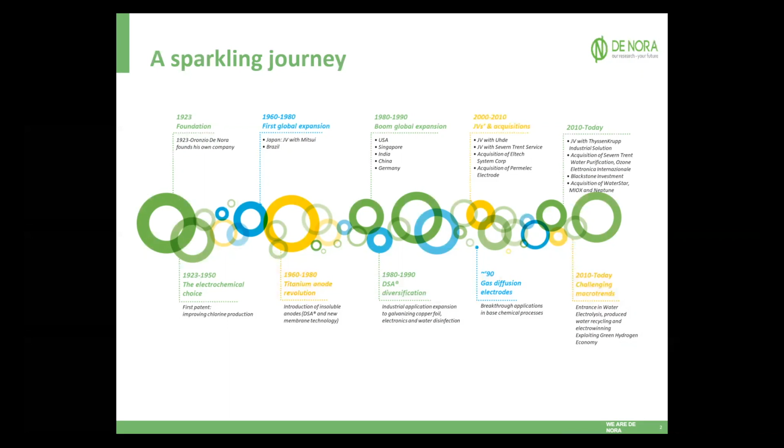De Nora Water Technologies. Water made easy is not just a phrase, it's a core value we hold dear at De Nora. De Nora Water Technology is a market leader in the field of water and wastewater treatment. We offer the most reliable, effective solutions, developed through more than 50 years of experience across municipal water, energy, marine, and industrial applications. Our global support network with 23 offices and 9 factories enables us to provide the highest level of support to our customers and distributors.

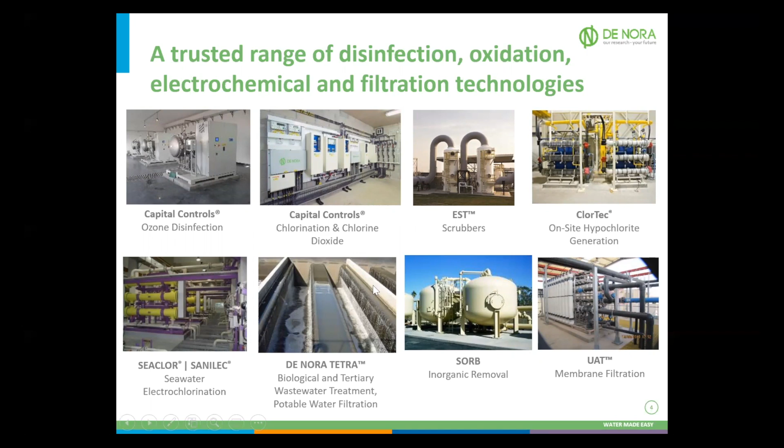Now, the range of products we offer. Under Capital Controls, which belongs to oxidation, we have the gas feed systems and chlorine dioxide. We also have ozone for higher oxidation requirements by customers. In the electrochemical range, we have ClorTec on-site hypochlorite generation, SEACLOR, and Sanilec for seawater chlorination. For filtration technology, we have membrane, inorganic removal which we call SORB, and De Nora TETRA for water and wastewater treatment.

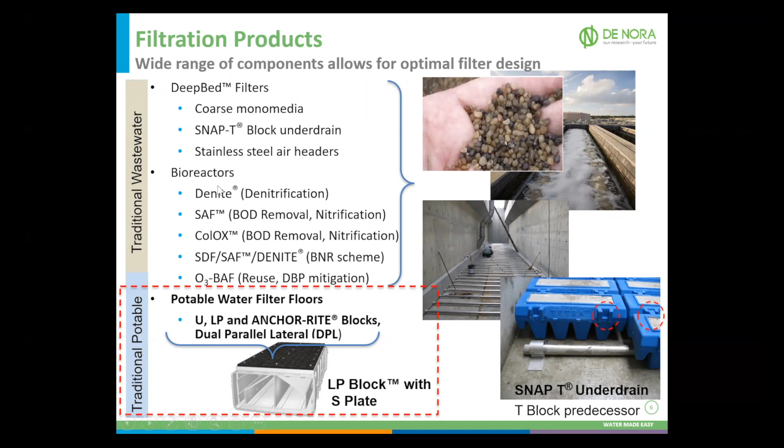Let me share with you our De Nora dual parallel lateral. De Nora provides solutions for both potable and wastewater applications. In wastewater, we develop deep bed filters that offer media, snap T, and stainless steel air headers as a whole package to our customers. As you can see here, this is the snap T, and this is the air header pipes. On the bioreactor side, we also provide solutions to your needs. As of today, I'll be sharing with you our underdrain system for potable water.

A brief history of TETRA, which started in the early 1960s. During that time, we were manufacturing concrete underdrain blocks. It was only in 1997 that U-block underdrains were introduced, made of HDPE. Two years later, media retention plates were introduced to be installed on top of the U-block. One year later, the LP block was introduced with increased surface area with GroutGrip. In 2008, we introduced the FlumeFlow design.

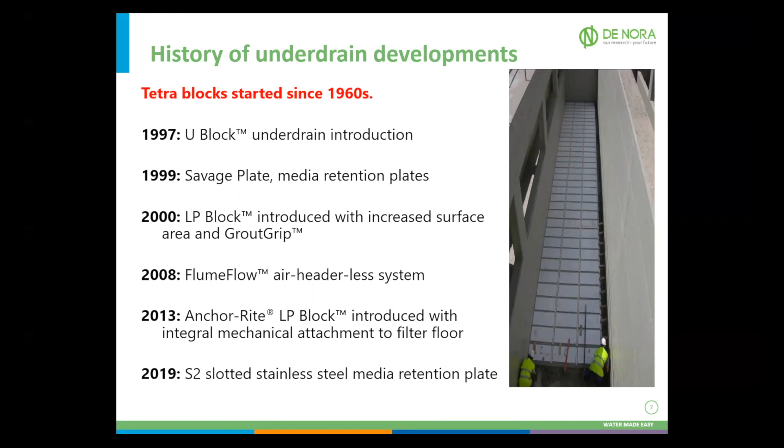It allowed contractors to use less material, or rather what we call the air header-less system, reducing cost savings for the end user. In 2013, the Anchor-Rite LP block was introduced with integrated mechanical attachment to the filter floor. In 2019, we introduced the slotted stainless steel media retention plate to the market.

This slide shows our different types of underdrain blocks. On the left you can see the U block, or universal block, which has been in the market for more than 20 years, and probably you can find similar blocks with the same dimensions in the market.

Next to it is our LP block. LP meaning low profile. As you can see from the height, it's much lower by about 4 inches, and the width is wider, while the length is the same.

For this block, we have patented our GroutGrip for the hold-down mechanism. With a wider width of the block, customers normally use about 1/3 less lateral, with fewer joints, more effective active area, and faster installation.

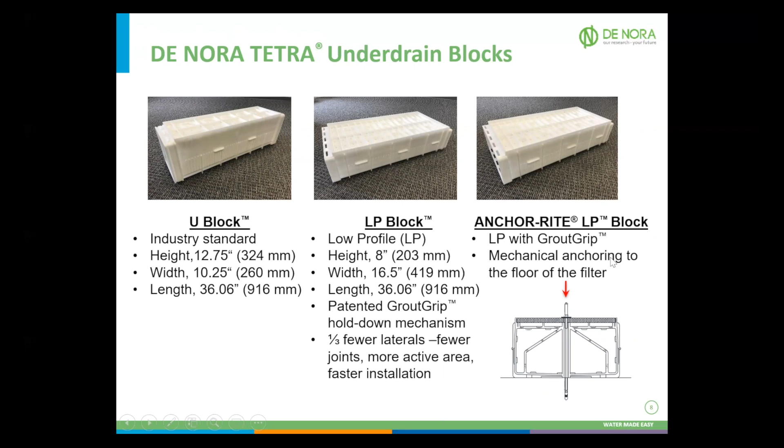On the right side is the Anchor-Rite LP block, which is an additional option. We have added the mechanical anchor rod to the filter floor on top of just using the GroutGrip.

Here you can take a closer look at the 3D dimensions of the U block and the LP block. As mentioned, the LP block is low profile and wider, as you can see from the dimensions here.

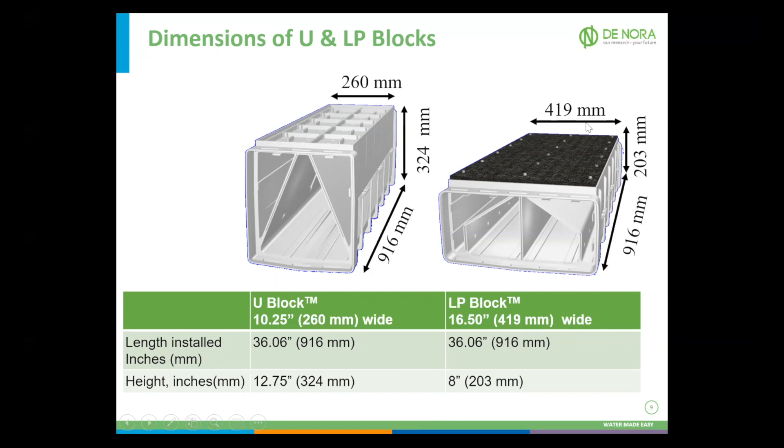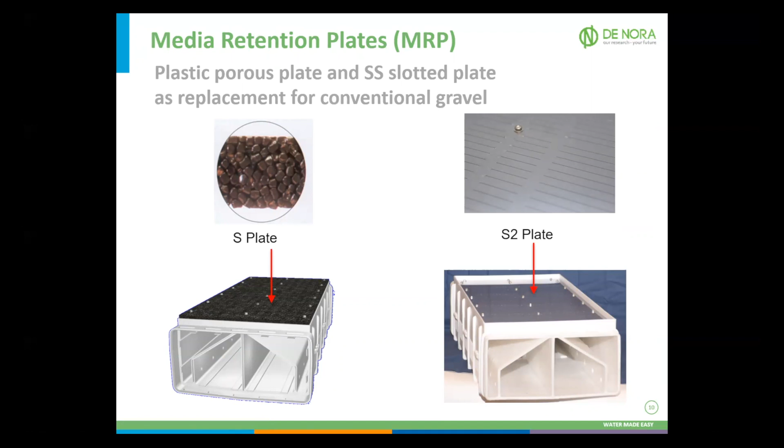For the LP block, we offer the media retention plate as a replacement for conventional gravel. So customers have the option, instead of using gravel, to select the media retention plate to reduce the gravel height in their tank filters.

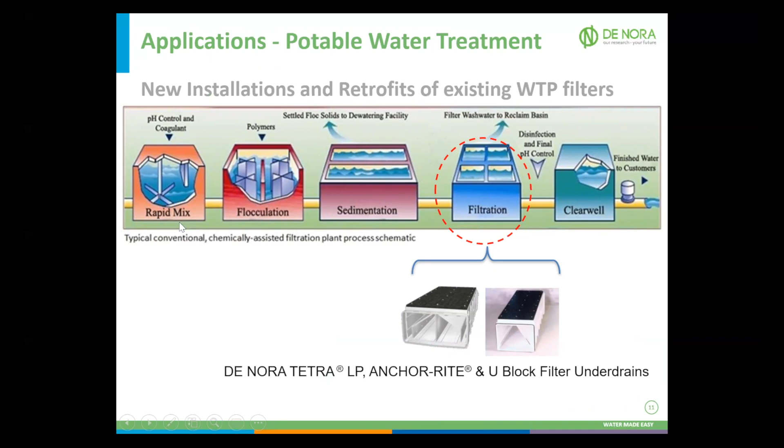This slide shares that the De Nora underdrain system can be used in both new installations and retrofits of existing filters. This is the typical water treatment flow, and this is where the underdrain block can be used.

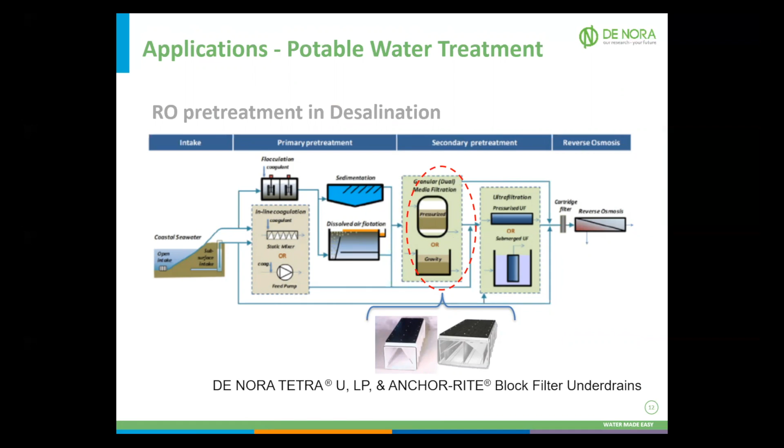The De Nora underdrain can also be used for ozone BAC, where existing filters can be upgraded or retrofitted to biological activated carbons, with ozone introduced earlier in the process.

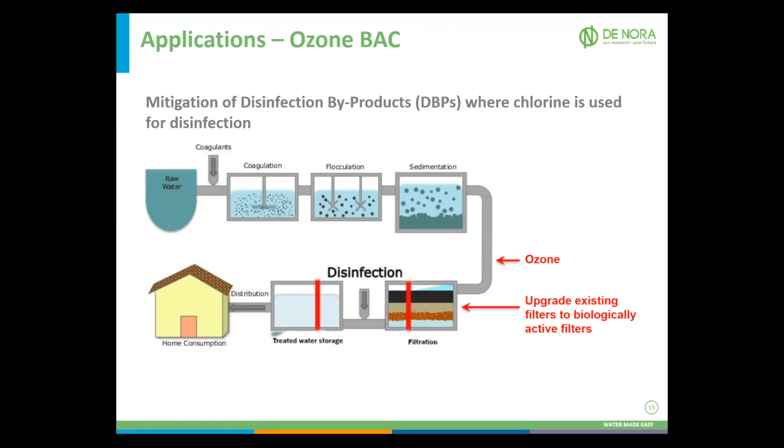Let's take a look at the typical gravity filter configuration. You can see number 1 and number 2. Number 1 is where we have the clean effluent and backwash inlet, so water goes in, backwash water goes in, and filtered water comes out from here.

Backwash air header from here, as you can see from the pipe. The U block or LP block, shown in gray plastic, with the media retention plate, followed by dual media filters and the inlet water distribution trough.

As mentioned, this is the inlet and effluent, and the backwash pipe. When water flows through and slowly goes down through the filtration process, it's collected in the effluent pipe. During backwash, the air header pipe is used, and the backwash inlet comes from here.

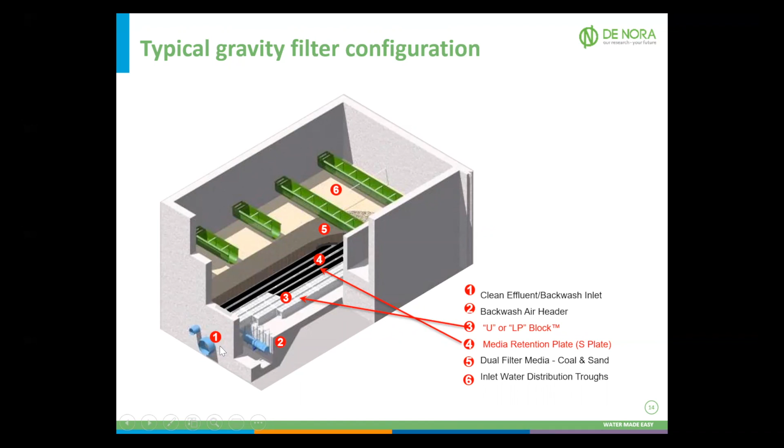LP block underdrain features and benefits: it can be used for combined backwash with air and water. Distribution is accomplished within the underdrain block, allowing even distribution of air and water backwash, resulting in effective bed cleaning and reduced operation cost with no dead zones.

No moving parts such as nozzles allow easy maintenance and long life for the end user. The low profile block, at 8-inch height, allows greater media depth and more height for air and water backwash. The wider profile means fewer lateral joints, less grout, and shorter, easier installation time.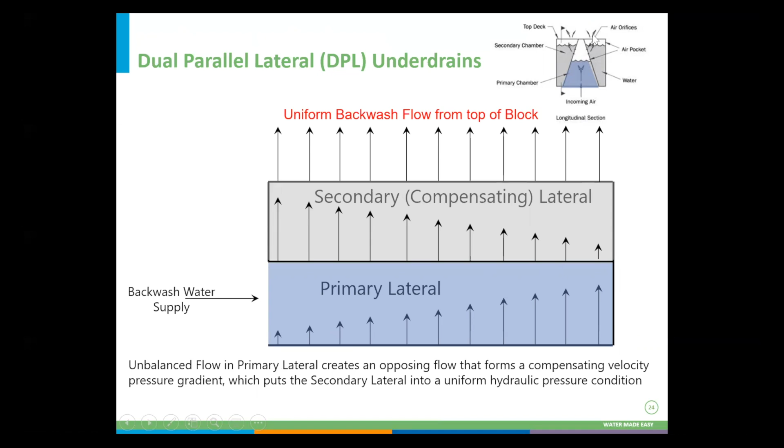The De Nora TETRA LP block. Let's take a closer look at the block, and how the construction of the LP block works.

These two are the primary lateral control orifices, and here is the secondary lateral. So the bolt hole, distribution of the orifice over here, and as said earlier, it gives you excellent distribution of backwash air and water, or air with water.

Suitable for retrofit various air and water backwash scheme, allows greater media depth, better filtration performance. Low profiles mean flexibility to adapt the hydraulic profile with limited driving head as compared to our competitors.

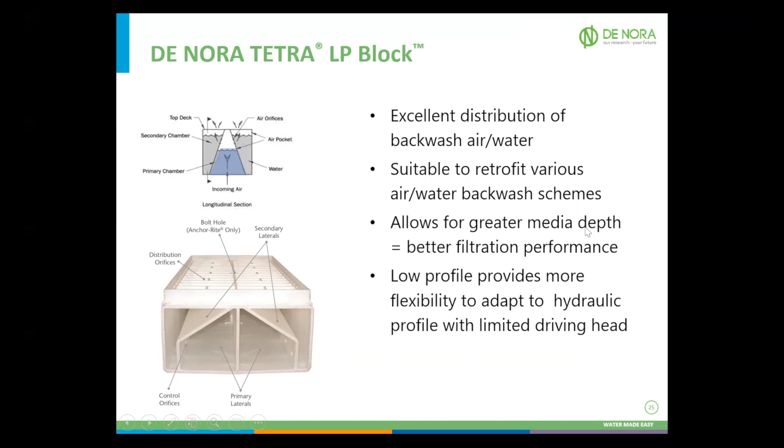We have the in-house capability to provide the CFD design. As you can see over here, this is what we can provide in-house for retrofit applications.

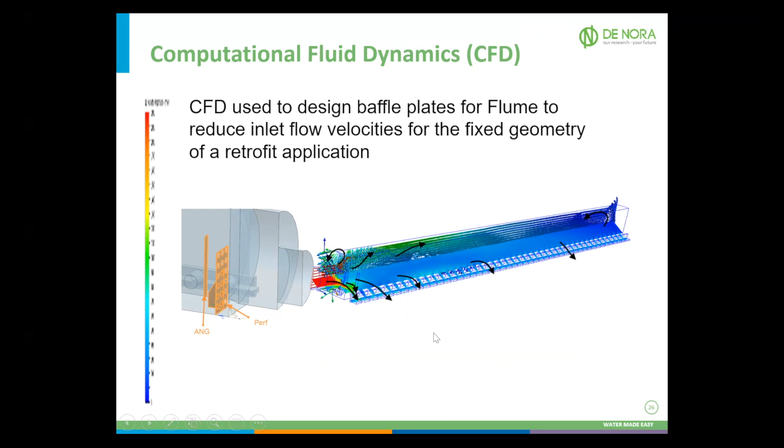Flume flow. This is our patented flume flow design. This allows the contractor or end user to have options to eliminate the air header pipes.

Basically, we have the interface plate that allows the combined air and water side flume to be used to ensure an even distribution of air and water. This is how the interface plate looks like.

You have the air header and the water side. No requirement of separate air header. Same HDPE construction as LP block, meaning you don't need to use any special modification. This can be fit on the existing LP block. Retrofit application, it can be used as well.

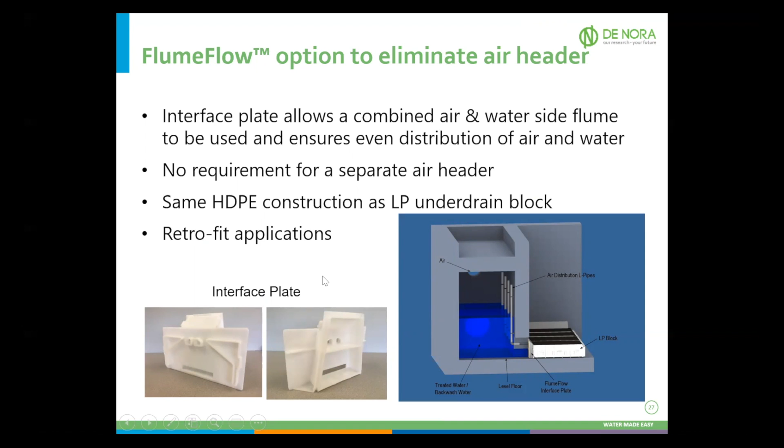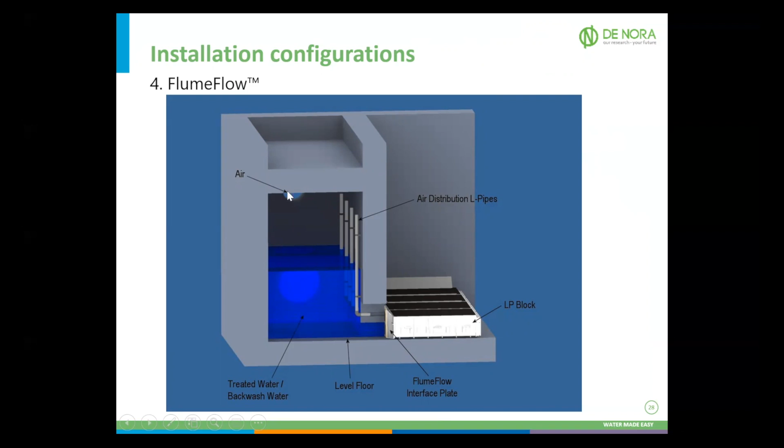Now you can see over here, this is how the installation configuration looks. These are the LP blocks, FlumeFlow interface plates over here, level floor, treated water or the backwash water here. Air will be coming from here. That's why you can see that we don't need the air header pipe and air distribution outlet pipe over here.

The De Nora TETRA experience. These are some of the notable experiences. We have a wide range of installation references over here, and these are some of them.

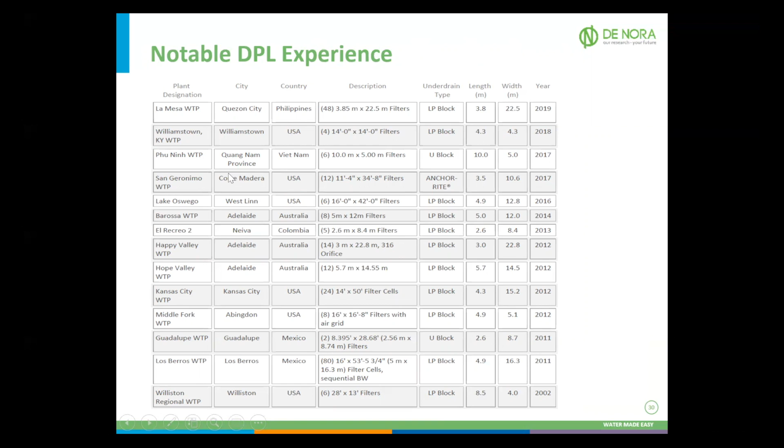For this slide, I would like to have your attention, I'd like to share with you that we have been involved in ozone-enhanced biofilter for more than 16 years.

As the chief operator commented, the U-block and S-plate underdrain has performed flawlessly throughout its 16 years of operation in the biological modes. From the moment it was commissioned until today, it has operated reliably with no maintenance issue or repair needed.

As you can see over here, this plant is in New Britain for the city water drinking plant. The application is for mitigation of byproducts, DBPs, solids, and the cryptosporidium removal.

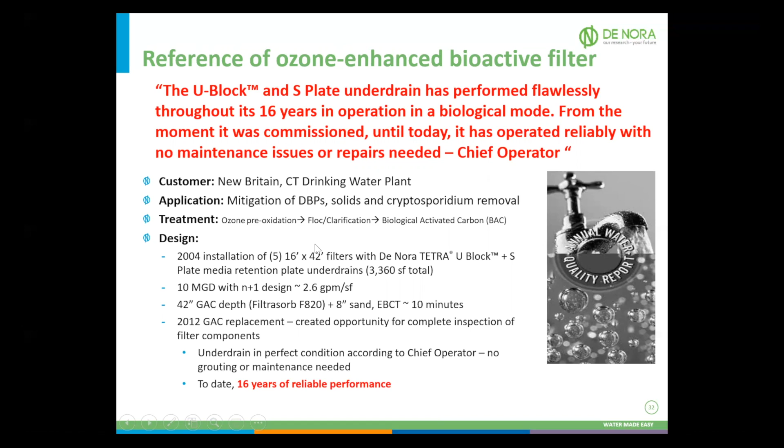This is the treatment process: ozone pre-oxidation, flocculation, and biological activated carbon.

Summary. The De Nora TETRA Underdrains LP block is a proven solution for clean water and wastewater applications. Capital costs are comparative, superior to nozzle and stainless steel. Operating performance is superior and leads to a lower operating cost and a lower whole filter cost.

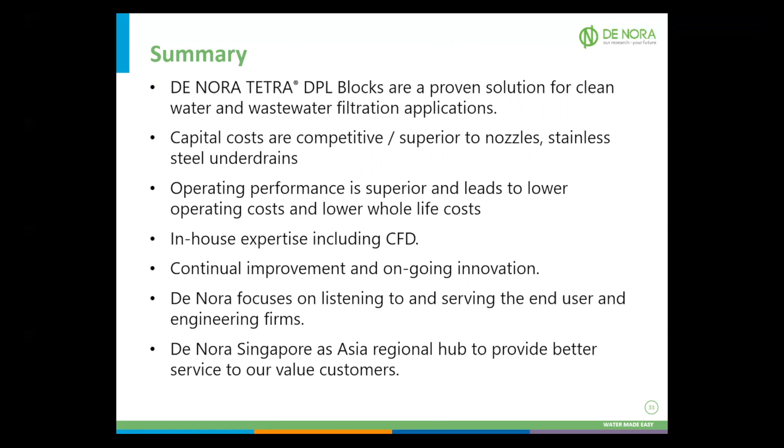We have the in-house CFD capability, continual improvement, and ongoing innovations. De Nora focuses on listening to and serving end users and engineering firms. And De Nora in Singapore is the Asia regional hub to provide better service to our valued customers.